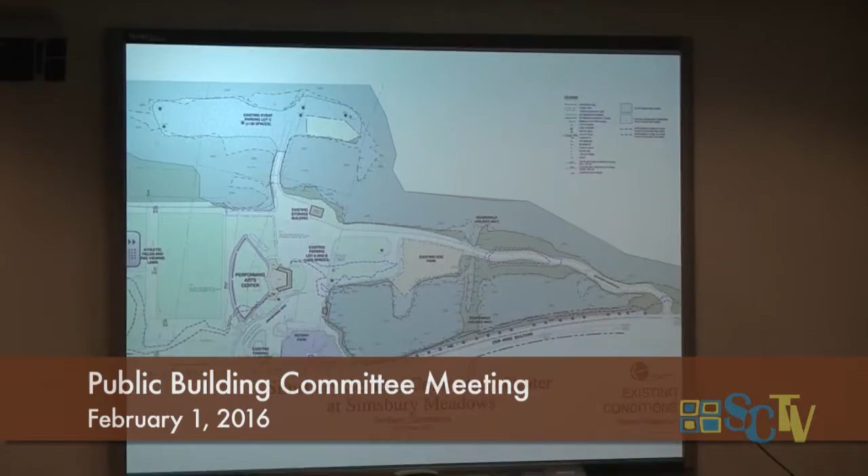There is a requirement for a certain amount of parking spaces, and part of that goal was to maintain those parking spaces with minimal disruption, basically keeping all the operations that PAC needs to go through functioning and not interfering with that. At the very end, you'll see some comparisons when you see the new senior center location.

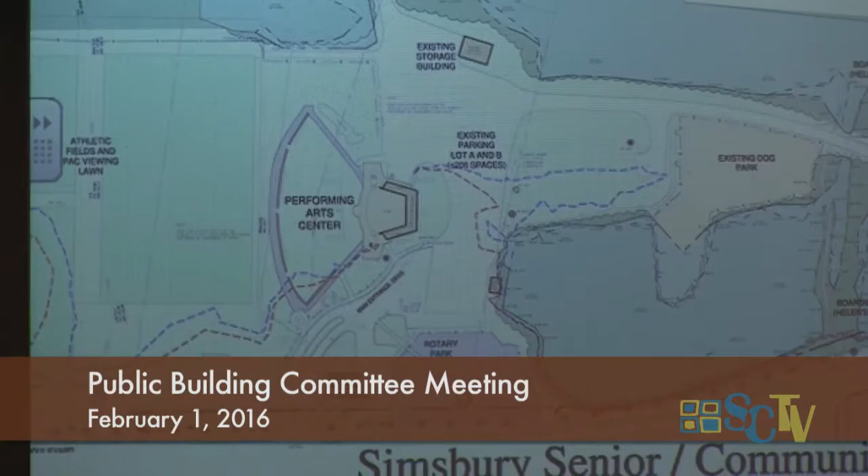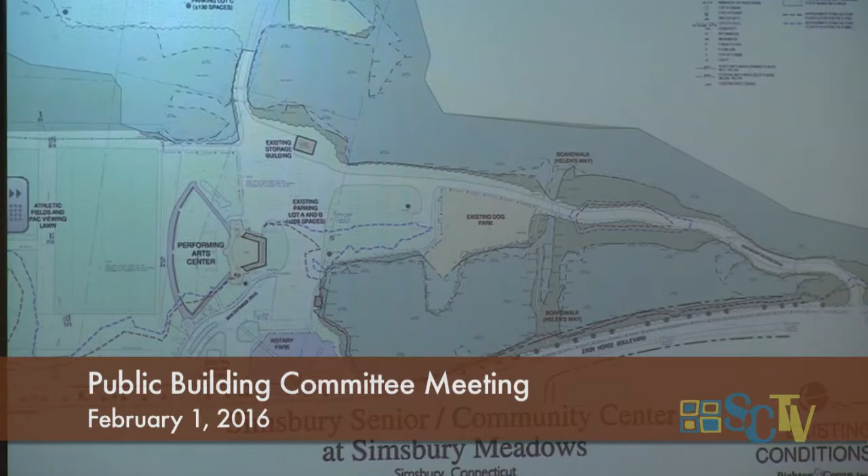The second goal was to minimize disruption from an environmental point of view. It's kind of hard to see with these colors, but in the blue, these are all wetland areas. Really deeper into the meadows is probably the highest value wetlands, but our goal is to minimize any disruption to the wetlands and concentrate the development related to the senior center in the areas that are already developed, and certainly not go into undeveloped areas.

There might be some edge impacts. One of the side goals is to make sure the total impact to federal wetlands, which most of these are, is less than 5,000 square feet, so we can avoid any Army Corps permits and DEP permits as well, which could last for months and sometimes even years.

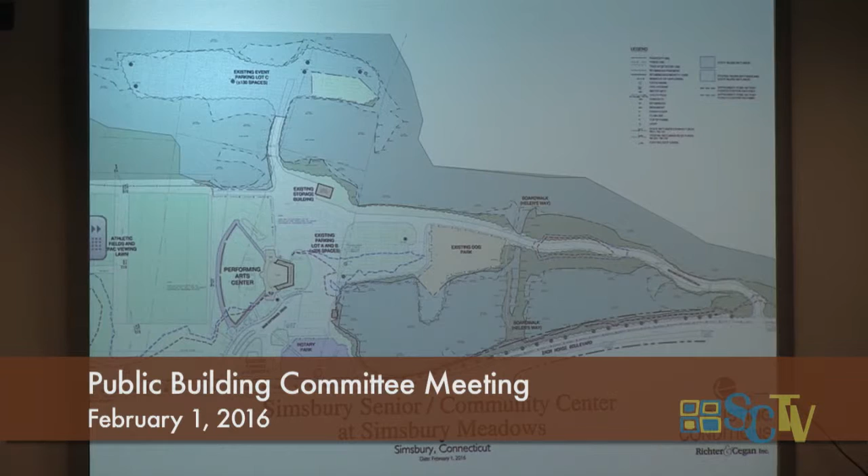So those are the basic objectives as we've approached this. As I mentioned, we've met with PAC to really get a good understanding of how they function and use the place.

This is where the proposed community center is in this scheme, and you'll see it in the other schemes as well. If you know the area back there, it's the lawn area right adjacent to the dog park. We've maintained all the circulation through the site. The main entry into the park is here, the playground over here. So as you round the bend, you align right up with the front door, the porte-cochere drop-off to the senior center.

It's a nice welcoming location in terms of entering into the site. We've maintained all the functions around the Performing Arts Center, and keep in mind that this will all be area for the senior center for 95% of the time. It's just that 5% when there's a performance and setting up for a performance where there's potential operational issues that have to be addressed. Most of the time, there's nothing happening out here, so now you have a really vibrant function going on there.

The dog park is off to this side. The circulation, the secondary back road, becomes a little more formalized and widened. We're able to add parking here in a non-wetland area without impacting the wetland area. So the net parking here, which was very important to PAC, we actually have an increase of 10 spaces. We've been able to do this in a way so as not to impact the parking for the performances. We also have formalized handicap parking area, which is not formalized now for PAC, and it meets all current standards.

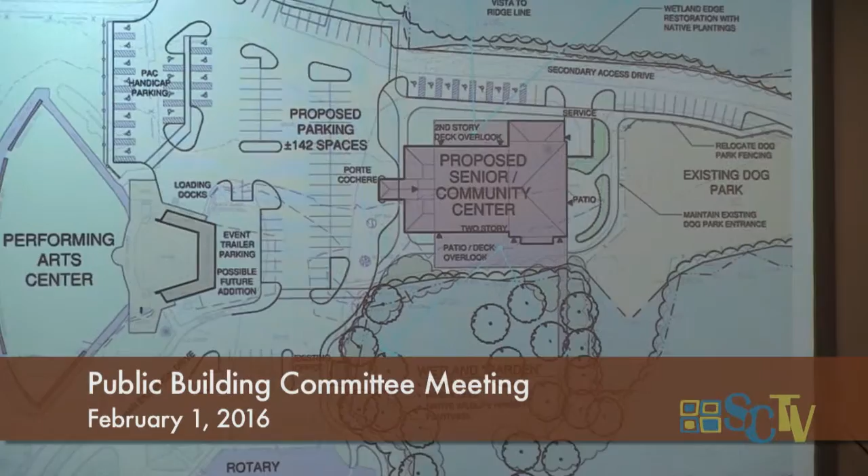To the west side is an outdoor deck or patio that could be used for both senior and community activities. There's also a small patio here on the dog park side of this. And then taking a wetland and creating, I think, a much stronger amenity, possible boardwalk, birdhouses, and native habitat plantings to upgrade the wetland area and create a scenic and attractive view off the west side of the building itself. So that's, I think, a good overview of this concept, how it works.

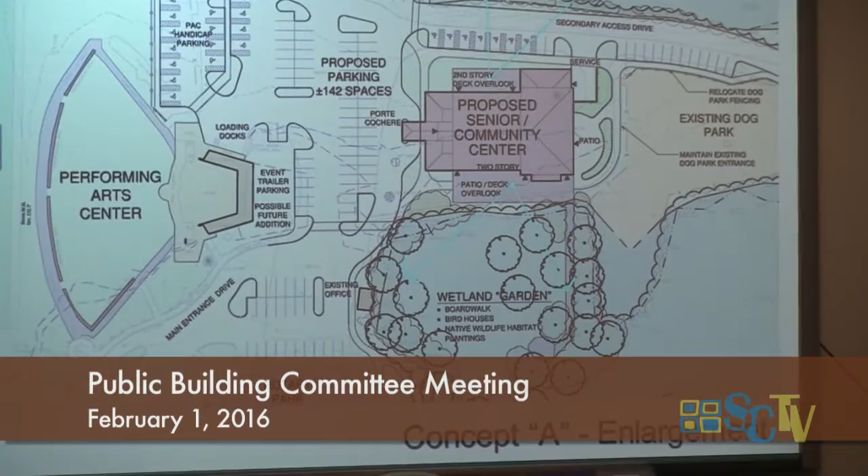I'm going to talk a little bit more, again, at the end about how it interfaces from an operational point of view with PAC.

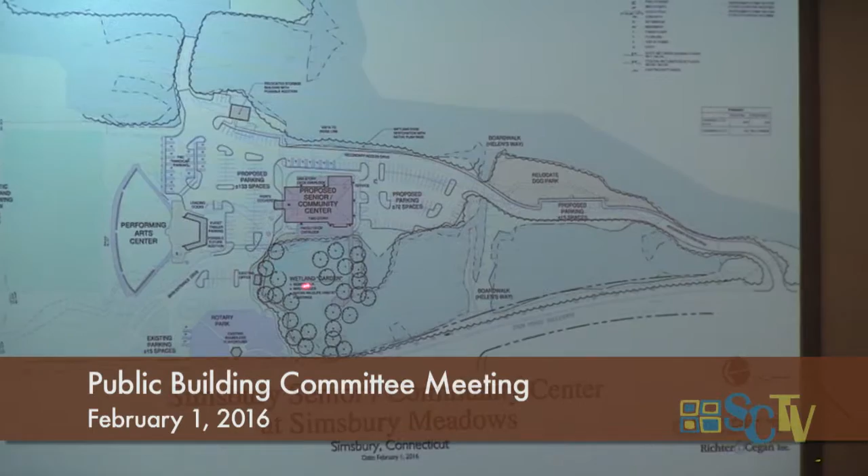The next scheme is virtually the same up front here, and all these interactions. By the way, there would be a new walk connecting down to Iron Horse Boulevard. You can also come across a crosswalk to connect to PAC from the senior center, as well as connect back down to Iron Horse. We also have walk connections down that secondary access drive as well, so there's really good pedestrian connections both around the whole facility and back down to Iron Horse.

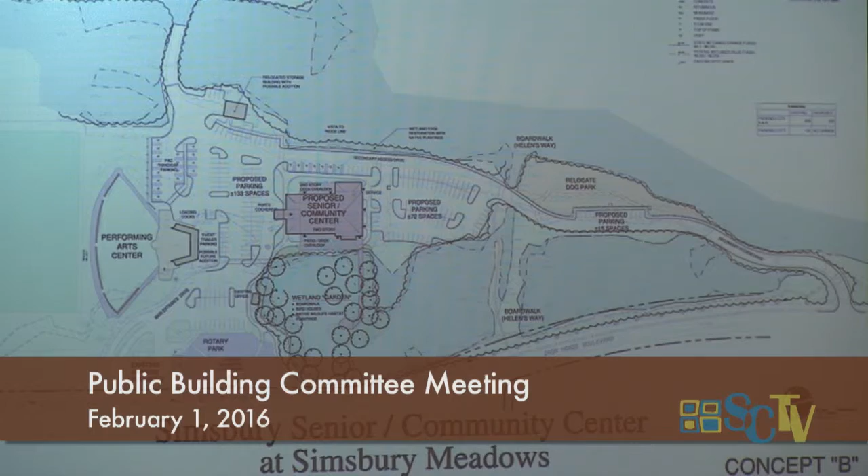This scheme, the big difference is we flipped the dog park with the parking. The parking in the first scheme was down in this area, about 300 feet from the senior center. By flipping the two, the parking now becomes much closer, much more convenient to the senior center. So it's just a second option.

We get about the same amount of spaces on either scheme, packed like this because the parking is also closer to the Performing Arts Center too. So that's a big difference.

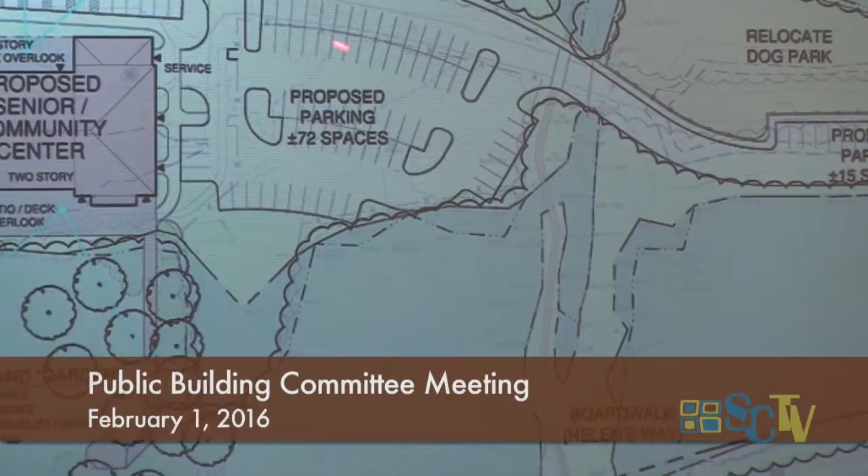As in a number of senior centers we've worked on, there's a front door, but there are also other functions inside the building. This gives another access way into the building. When there's activities going on in front here, I'll talk about at the end, I think you'll see the back side used a little more often, that 5% of the time.

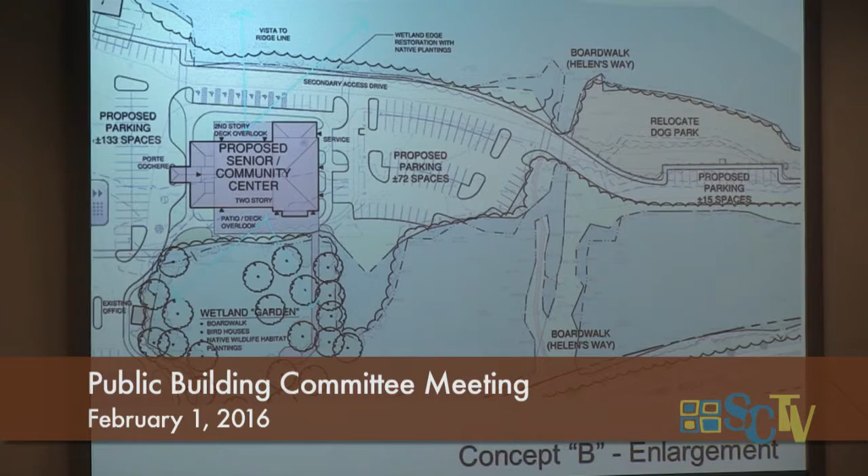Handicap parking in all the schemes is up here, so you don't really have to cross any aisles. You can come right into the building off this side. It's convenient from that point of view.

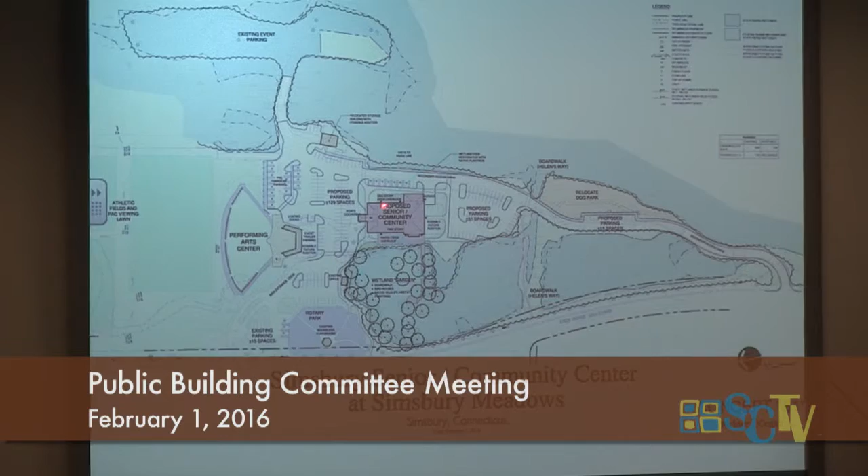And then B1 is a slight variation on B. What it does is say, okay, let's anticipate, let's not box ourselves in here. Let's anticipate that maybe in the future, 5, 10, 20 years, you might want to expand the senior center. Because it's so tight in here, how would we do that?

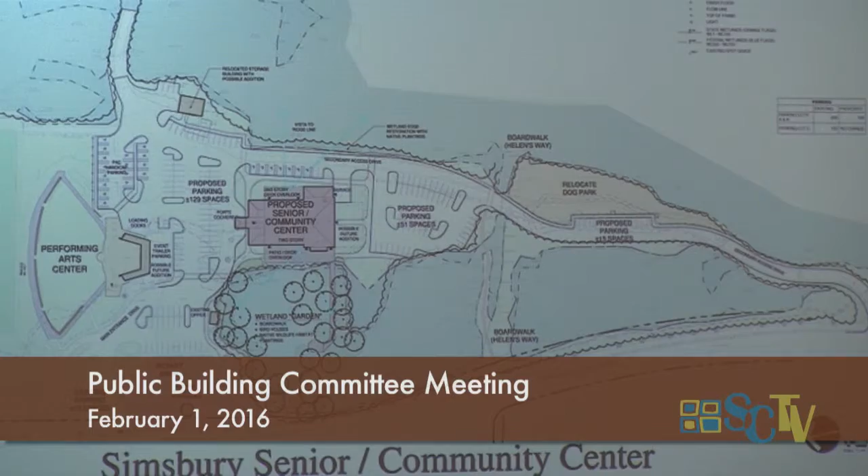So if you want to go into the enlargement, what we've done is reduce the size of this parking lot and shown where an addition could happen. We've been doing this more and more on buildings like this, so you do anticipate additions. We oftentimes get called into projects for expansion, and you back yourself into a corner where you don't have that option. So this allows us to do that.

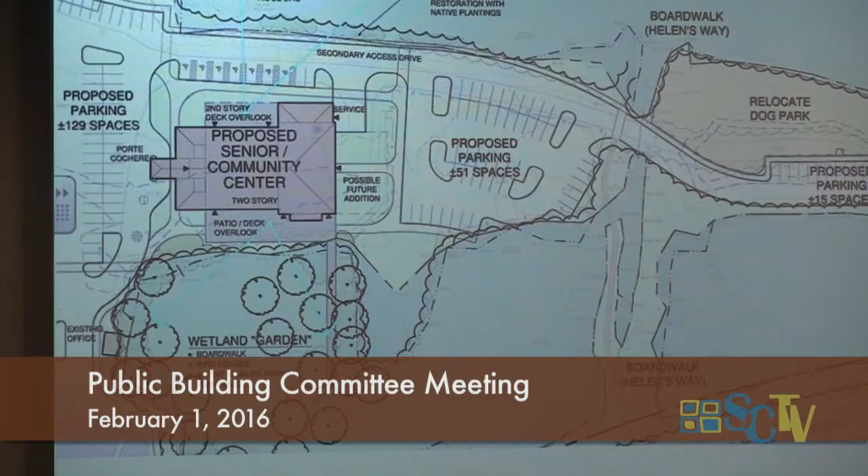Now what we could do is actually build the parking in here initially because of the importance of maximizing our parking, and take out the parking later on. This scheme shows where you have minimal disruption to your physical improvements to add an addition later on. So those are the three schemes.

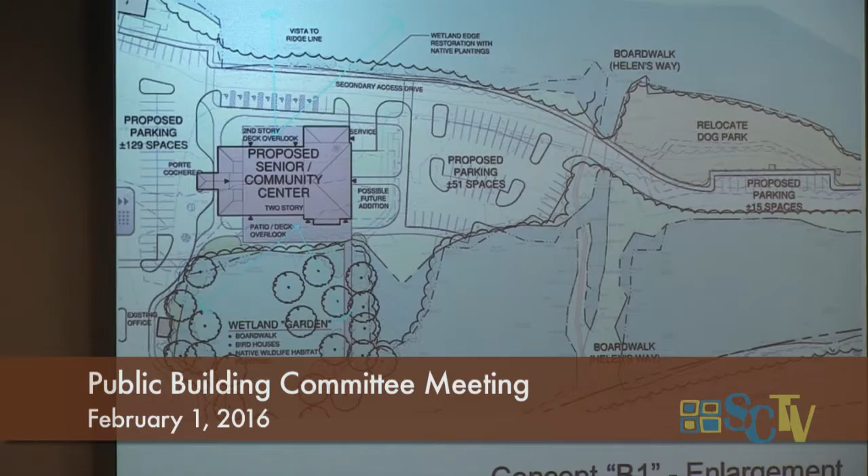So I think we fit the building in here. I think it does function with the other things that are there. It actually creates a nice synergy with the play area, the Performing Arts Center. There's been some discussion of activities here that would relate to that.

We had a good meeting with members of PAC. And I think the scheme is sensitive, that it focuses on areas that have already been developed, with very little edge impact on the wetlands, and we hope to leave those edges in better condition than they are now if this project moves forward.

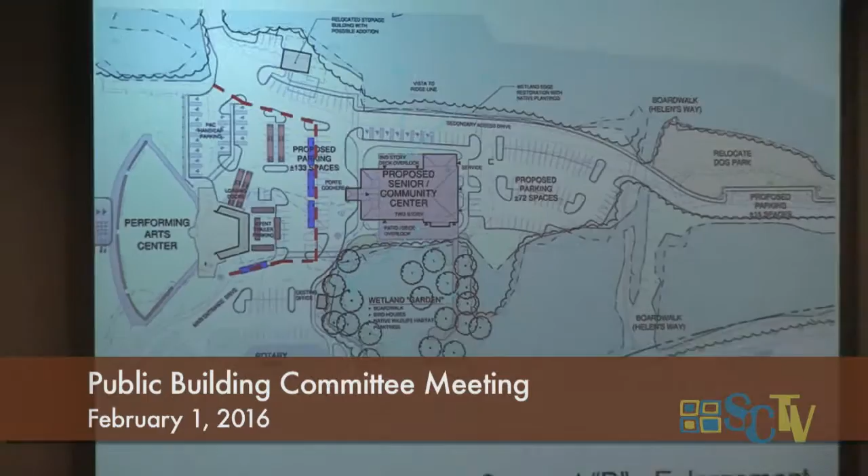That's a quick overview. Can you briefly describe what we talked about as far as what the building would be? 1-story, 2-story, 3-story, 4? Sure.

It will be a 2-story building. There are 2 major spaces on the second floor, which would be the fitness room, and there's a 1,000 square foot activity room with a dividing wall. We put that on the second floor so we don't have to get into a huge amount of structure on the first floor to support a second floor above.

And what it allowed us to do, we had a maximum width of this building to fit it in here of 115 feet. We came in a little bit below that. The length was a little bit more flexible.

So again, it'll be the main multi-purpose room, which is 4,000 square feet. Just because the room is that size, it's going to be a much higher ceiling, so we'll say that's 1.5 stories, but that's one big volume.

In this particular plan, it's on the south side. As we started our discussion, we'll probably flip it around to the west side so you get a view of the wetlands. Again, the plan hasn't even been shown yet, but we came up with some concepts.

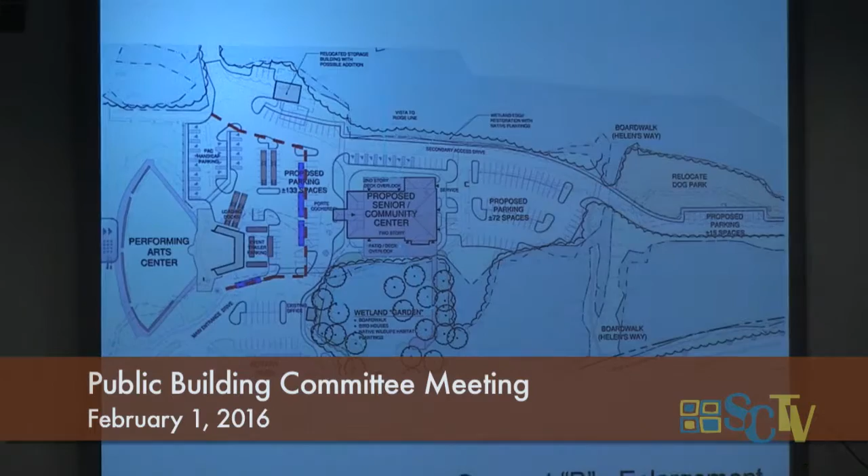And then, of course, you need toilets on both floors, you need stairwells, an elevator, and the front of the building, which would be all of the administrative, the lobby and the small gathering areas, that would most likely be 1 story. So the 2-story section is really right in the middle.

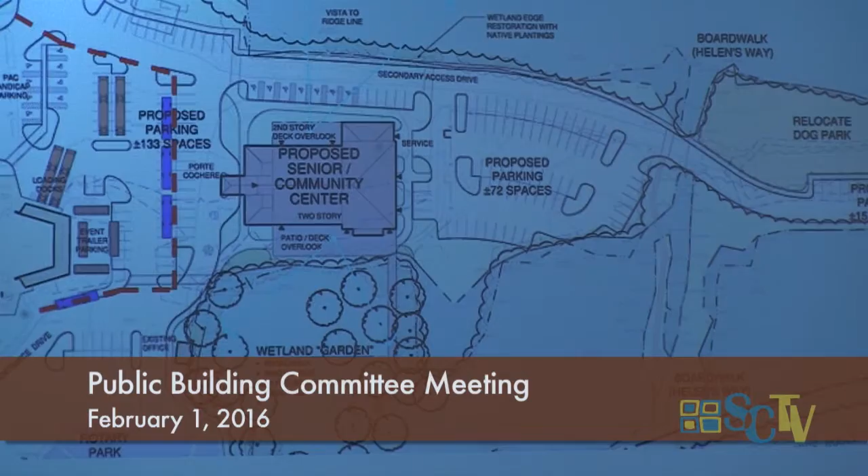Basically what you did was fit your program in with what you talked about with reference to the senior center people, as well as the program that came out of the performing arts discussions.

As we start to develop this, one of the things the town engineer has been saying to me more than once, which I think is very appropriate, is we're going to look to see if there's a way a portion of the building could potentially be open and a portion closed for activities for PAC, for example—a reception in the large meeting hall, but people don't have access to upstairs. That's going to come into play as we start to develop this and vet it through the various organizations that will use it.

So the plan now is to talk with the people that run the dog park. Correct—Jeff is trying to set something up, possibly this week.

And then you'll come back to us with more detail in reference to the building, so we can then make the proposal to the town Board of Selectmen. Yes, that's the program. Any questions?

I have a question—how many elevators will you be putting in? Just one. Is there no possibility of getting one in the back? You've got a lot of parking back there.

If there's a way they could come in—the elevator right now would basically probably be in the middle of the building, so the building isn't that long. Two elevators would be very extravagant for a building this size.

You know this. Yeah, I know. We've always had a problem with elevators—that's why I bring it up, you know.